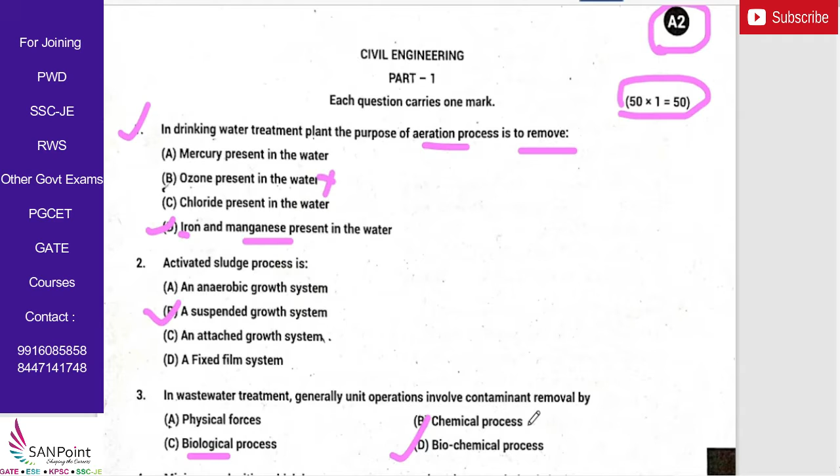Hence option D is correct. Next question. Activated sludge process is. So again it is from environmental engineering. Here the correct answer is it is a suspended growth system. Next question. In wastewater treatment, generally unit operations involve contaminant removal by. So again it is environmental engineering. Here the correct answer is biochemical process. Here even the biological process happens and along with that the chemical process also happens. So ಎರಡು simultaneous ಆಗಿರತ್ತೆ. Hence the correct answer here is option D.

Next question. The minimum velocity which is necessary to prevent the grit accumulation is in the range of. Again it is from environmental engineering. Here the correct answer is option C. Next. In activated sludge process, called ASP, most of the settled sludge is returned to the aeration tank to maintain. So activated sludge process ಒಳಗೆ ನಿಮ್ಗೆ ಗೊತ್ತಿರಬೇಕು, the activated sludge is recycled, or it is resent back. So why it is done ಅಂತಂದ್ರೆ: high population of microbes that permit rapid breakdown of the organic compounds. ಹೆಚ್ಚು ಮೈಕ್ರೋ ಆರ್ಗ್ಯಾನಿಸಮ್ಸ್ introduce ಮಾಡೋದಿಂತ್ರ process quick ಆಗಿ ಆಕೈತಿ, so we recirculate the activated sludge here. Again it is from environmental engineering.

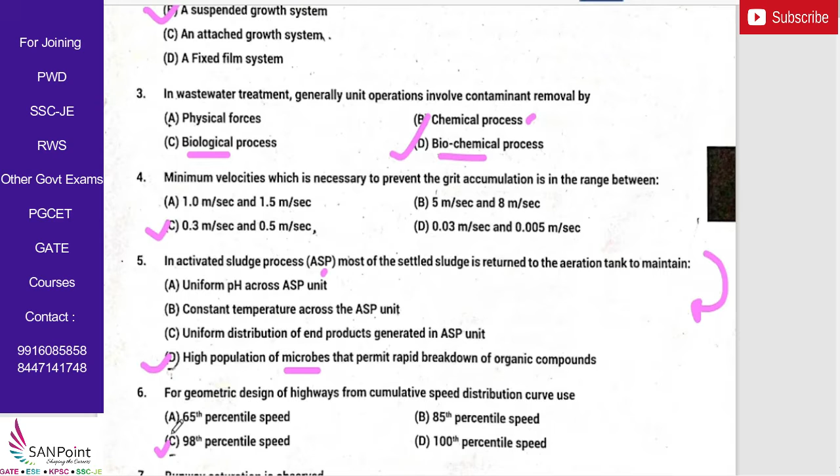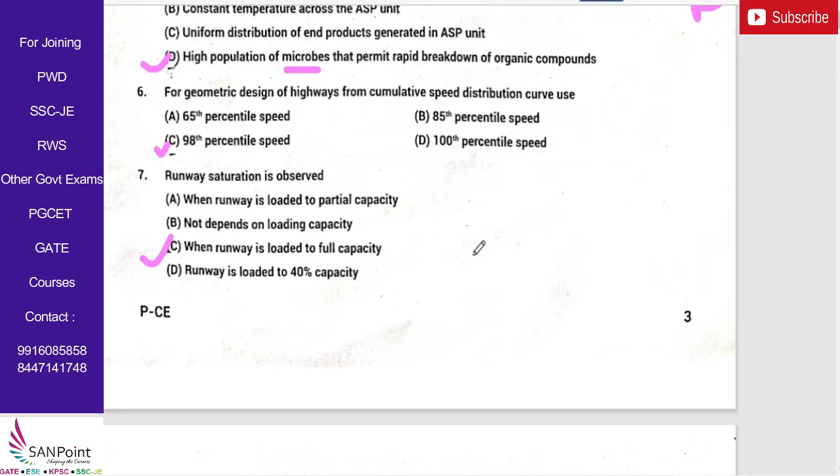Next question. For geometric design of highways from cumulative speed distribution curve use. So ನಾವು highway design ಮಾಡಬೇಕಂದ್ರೆ ಯಾವ ಸ್ಪೀಡ್ use ಮಾಡ್ತೀವಿ. It is 98th percentile speed, which is from highway engineering. Next question. Runway saturation is observed. It is from airport engineering. Here the correct answer is when the runway is loaded to the full capacity. Next question. Roughness of road can be measured using. Again it is from highway engineering. Here the correct answer is bump integrator.

Next. When cement concrete road is loaded at the corner, the critical combination of the stress. ಇದ್ರ ಮೇಲೆ ಬಹಳ ಸಲ ಕ್ವಶನ್ ಕೇಳ್ತಾರೆ different exams ಒಳಗ. But here we have studied in detail that in cement concrete road, when we consider the critical combination of the stresses, we don't consider the frictional stresses. Remember that at the corner, we consider only the load and the warping stresses.

So hence none of them is right in this particular option. So it is not applicable.

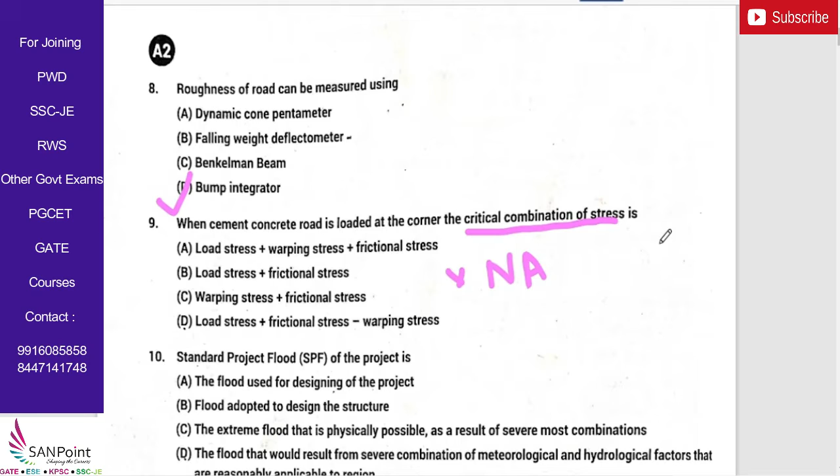Next, standard project flood (SPF) of the project is the flood that would result from severe combination of meteorological and hydrological factors that are reasonably applicable to the region. Again, this is from hydrology. 11th is also from hydrology.

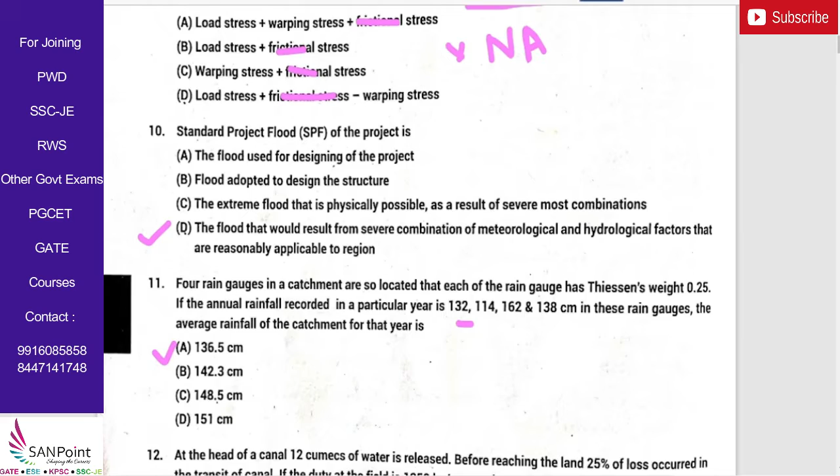4 rain gauges in a catchment are so located that each of the rain gauge has Thiessen weight of 0.25. If the annual rainfall recorded in a particular year is 132, 114, 162 and 138 centimeter in these rain gauges, the average rainfall of the catchment of this year is 136.5. So you can see here the solution.

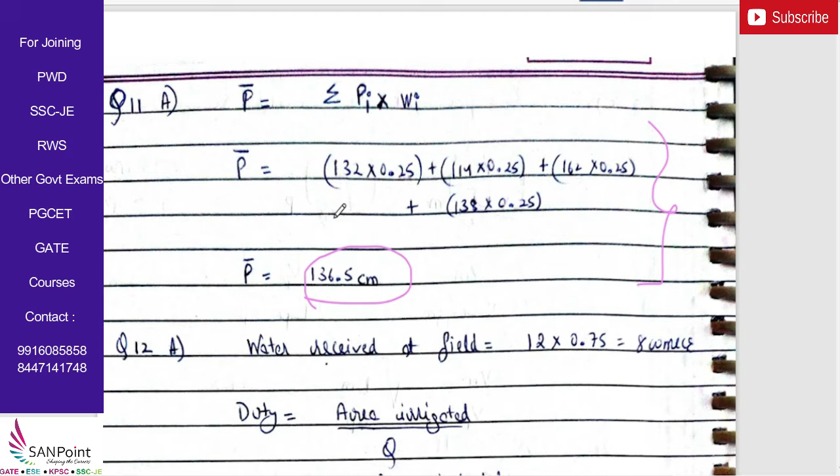Okay, so you can remember. So you can just go through the solutions. I won't be explaining the solutions of the numericals here as it will consume lot of time, but the numericals are solved very neatly stepwise. You can just go through that. If you got a different answer, you can just cross check.

Next question. In the head of a canal, 12 cumecs of water is released. Before reaching the land, 25% of loss occurred in the transit of the canal. So 25% loss happens. If the duty at the field is 1250 hectare per cumec, the area that can be irrigated is 10,000 hectares. So you can see the solution here. Okay, so this is the answer. You can just go through the steps.

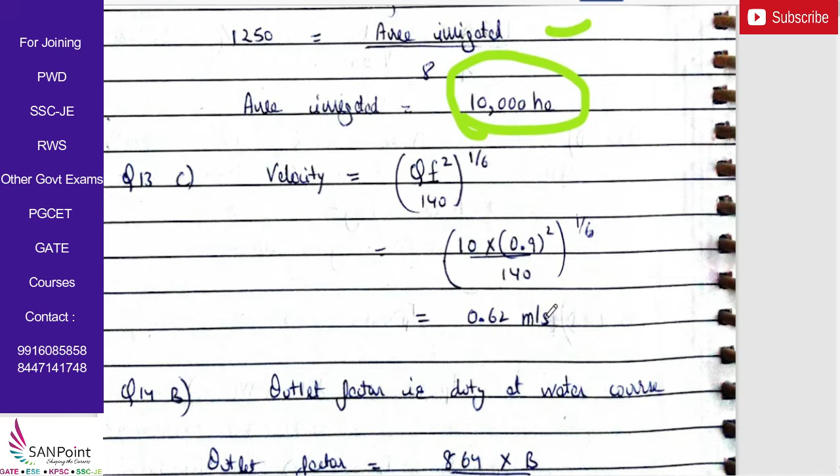Okay, next question. An unlined irrigation canal has to carry a full supply discharge of 10 cumecs. Assuming Lacey's silt factor as 0.9, the velocity in canal is 0.62 meter per second. So you can see here, this is the answer. Just go through the calculation.

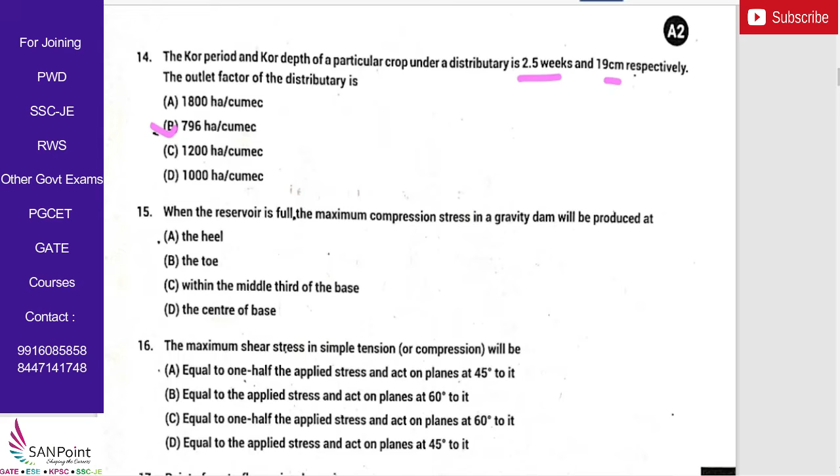Next, the kor period and the kor depth of a particular crop under a distributary is 2.5 weeks and 19 centimeter respectively. So kor period is 2.5 weeks, depth is 19 centimeter. The outlet factor of the distributary is option B, that is 796 hectare per cumec. So here you see, this is the answer. Next question.

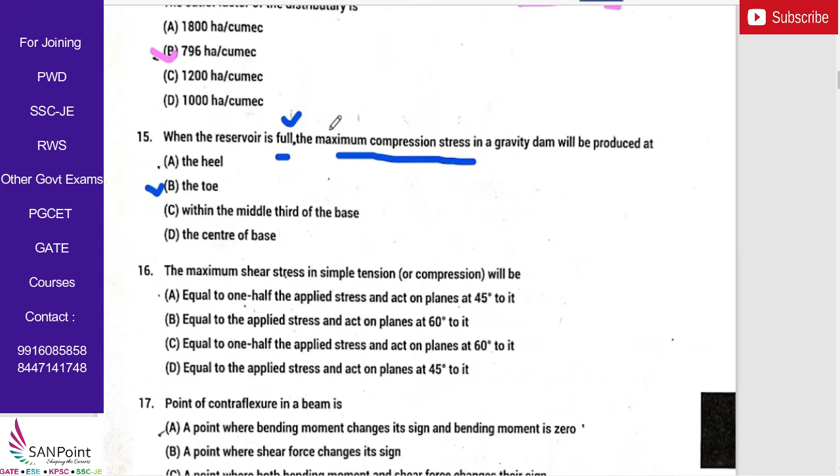When the reservoir is full, the maximum compression stress in the gravity dam will be produced at toe. Remember this. Okay, here if instead of full it was empty, then the answer would have been heel.

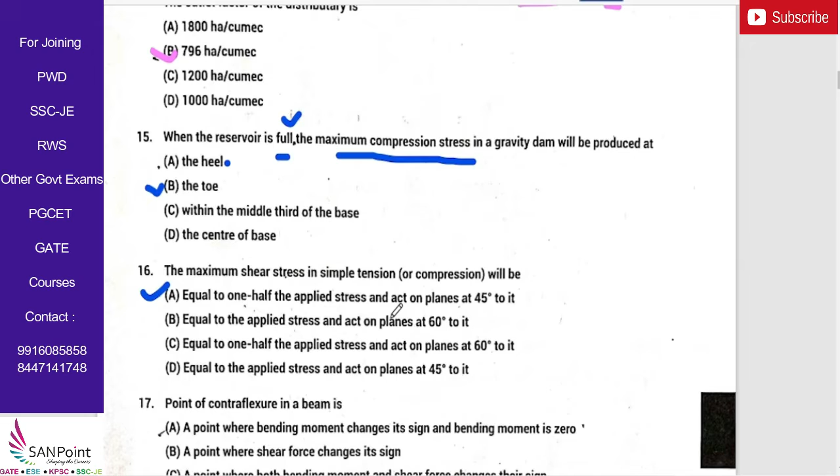Next question. The maximum shear stress in simple tension or compression will be equal to 1/2 the applied stress and act on planes at 45 degrees to it. Next question. The point of contraflexure in a beam is a point where bending moment changes its sign and bending moment is 0 here. Remember this.

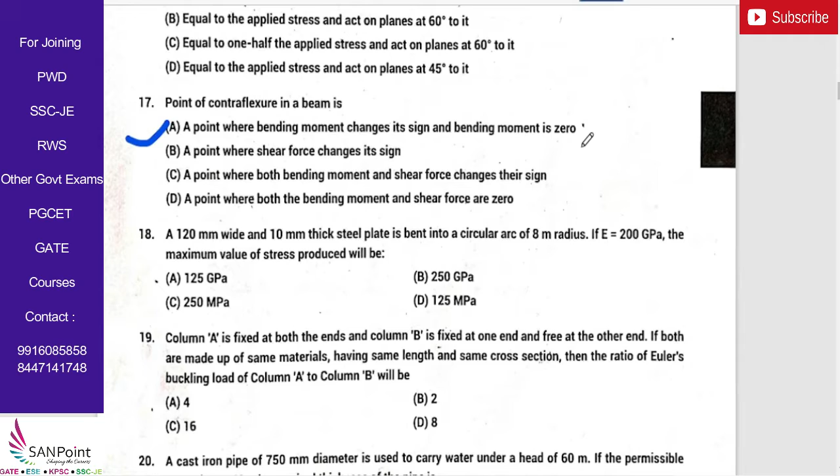Next, a 120 mm wide and 10 mm thick steel plate is bent into a circular arc of 8 meter radius. If Young's modulus is 200 GPa, the maximum value of stress produced will be, so if you see the solution here, this is the calculation. So it is 125 MPa. So here the correct answer is option D.

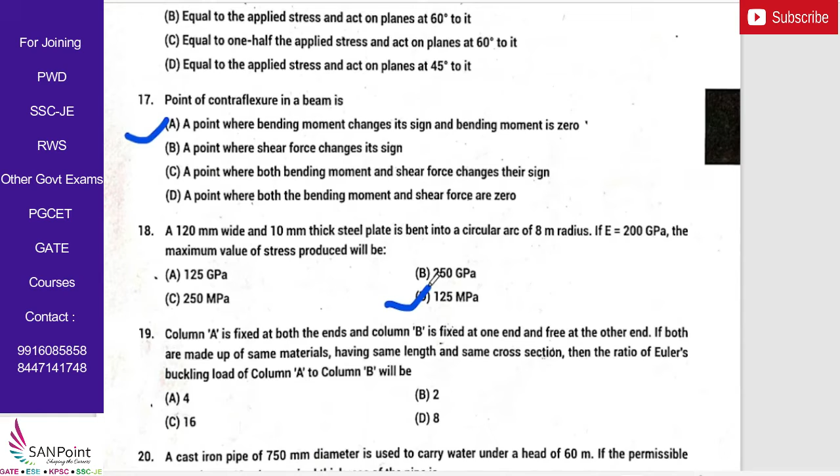Next question. A column A is fixed at both the ends and column B is fixed at one end and free at the other end. If both are made up of the same materials having same length and same cross section, then the ratio of Euler's buckling load of column A to column B will be equal to what? So it is 16. You can see the solution here. Okay. So this is the calculation. This is how we will get the answer as 16.

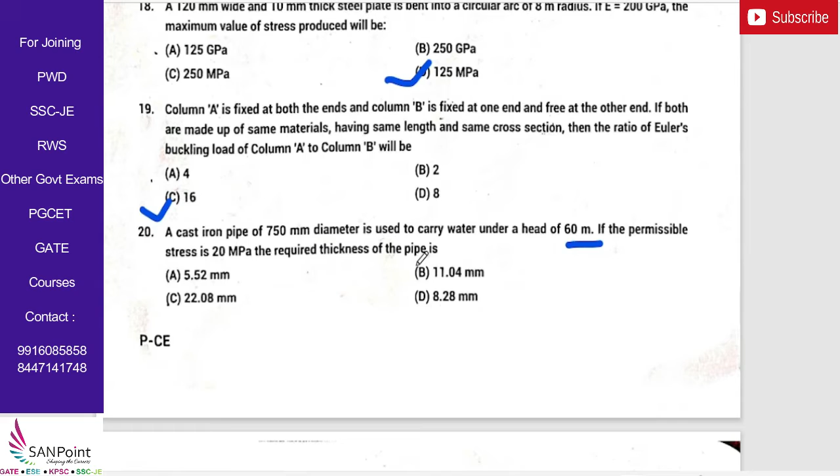Next question. A cast iron pipe of 750 mm diameter is used to carry water under a head of 60 meter. If the permissible stress is 20 MPa, the required thickness of the pipe is option B. Okay, 11.04. So you can see here, this is the calculation.

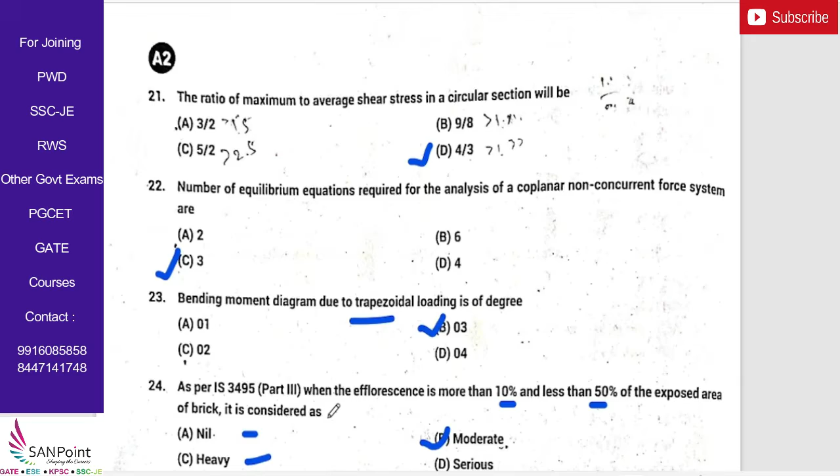Next, as per IS 3495 part 3, when the efflorescence is more than 10% and less than 50% of the exposed area of the brick, it is considered to be what? Moderate. So based on what percentage the efflorescence covers, we classify it. So you need to remember the table.

Next, the ordinary Portland cement achieves 70% of its final strength in how many days? In 7 days. So that's why we find the compressive strength at the 7 day.

Next question. Area of plan of an old map plotted to a scale of 10 meters to 1 centimeter measures 100.2 square centimeter by a planimeter. The plan is found to have shrunk so that a line originally 10 centimeter long measures 9.7 centimeter on the map.

The true area on the plan of the map will be equal to 106.50 centimeter square. So you can see here the calculation. So this is the solution here.

Next question. The focal length of the object glass of a tachyometer is 200 mm. The distance between the vertical axis of the tachyometer and the optical center of the object glass is 100 mm, and the spacing between the upper and the lower line of the diaphragm axis is 4 mm. With the line of collimation perfectly horizontal, the staff intercepts are 1 meter top, 2 meter in the middle and 3 meter bottom. The horizontal distance in meters between the staff and the instrument is option A.

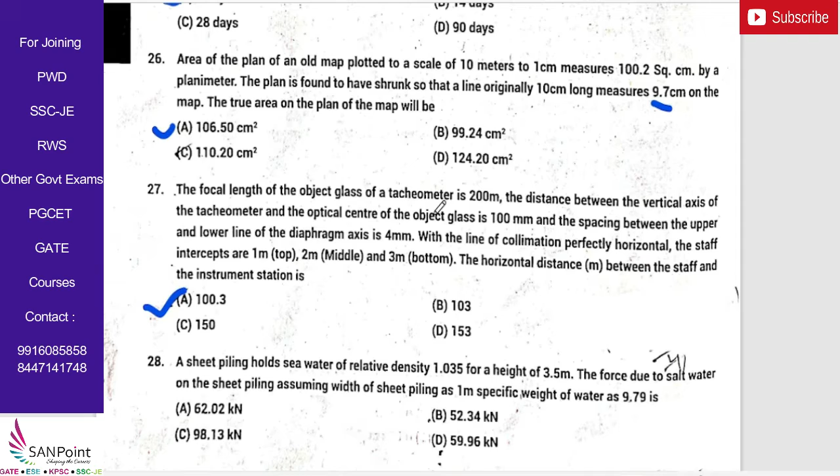Okay, so all these are in survey; if you remember the diagram, then only you will be able to answer these kind of questions. So here this is the solution.

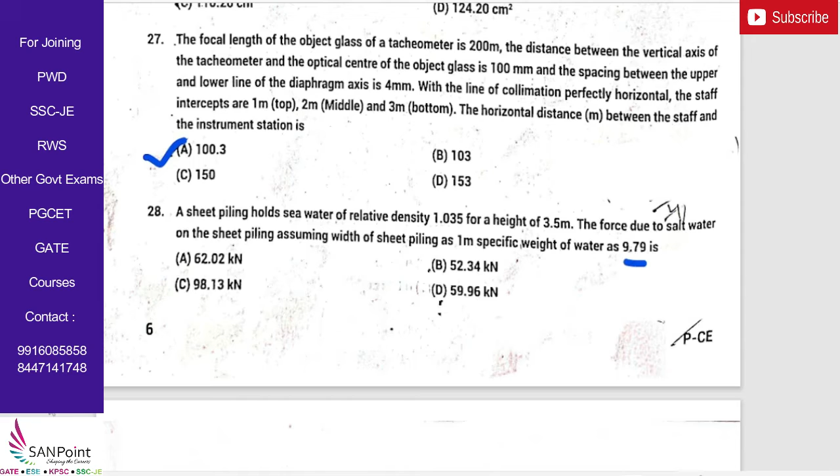Next question. A sheet piling holds seawater of relative density of 1.035 for a height of 3.5 meter. The force due to salt water on the sheet piling, assuming width of sheet piling as 1 meter, specific weight of water as 9.79, is? So the force is what they are asking here. Here the correct answer is option A, that is 62.02 kilonewton. So you can see here, this is the solution.

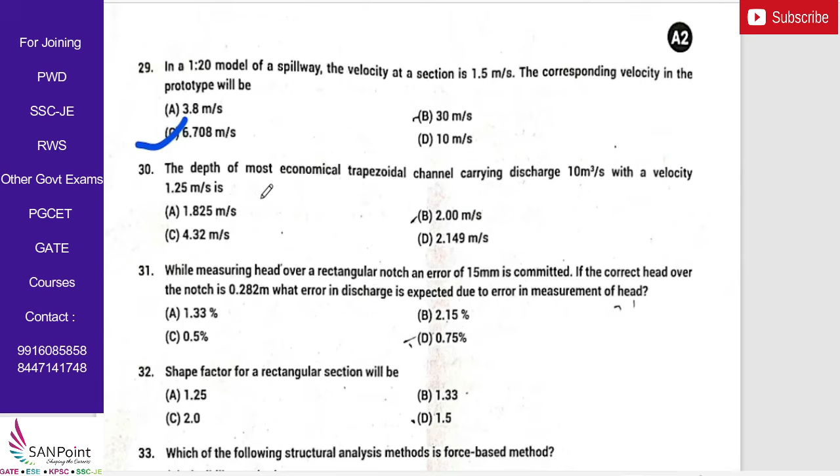Next, the depth of most economical trapezoidal channel carrying discharge 10 meter cube per second with a velocity of 1.25 meter per second is what? So it is 2.149 meter. So you can see here, this is the solution.

Next question. While measuring head over a rectangular notch, an error of 15 mm is committed. If the correct head over the notch is 0.282 meter, what error in discharge is expected due to error in measurement of the head? So here the answer is not matching. Actually we are getting somewhere around 7.9. You can just cross check.

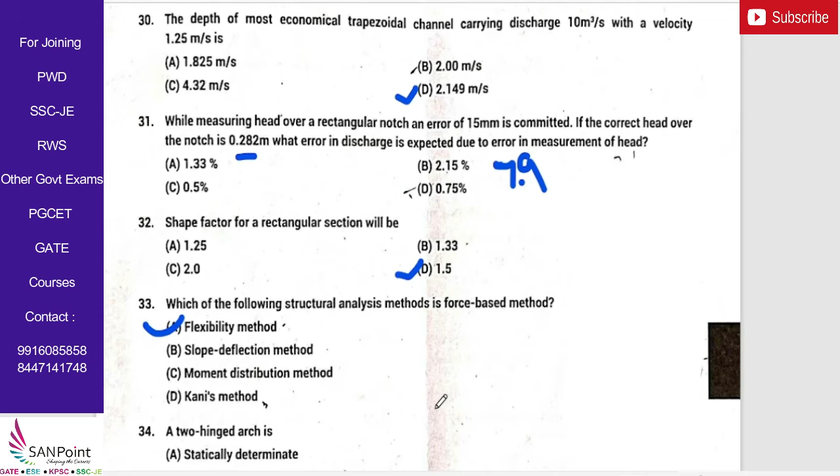Next, shape factor for a rectangular section will be equal to what? It is 1.5. Next, which of the following structural analysis methods is a force based method? So here the correct answer is option A, that is flexibility method. Next, two hinged arch is, so what is it? It is statically indeterminate to 1 degree.

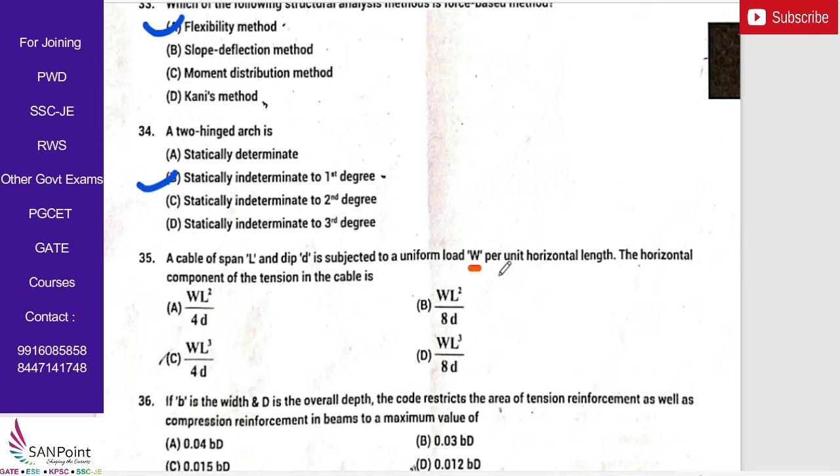Next, a cable of span L and dip D is subjected to a uniform load W per unit horizontal length. The horizontal component of the tension in the cable is option B. Next, if B is the width and D is the overall depth, the code restricts the area of tension reinforcement as well as the compression reinforcement in beams to the maximum value of 0.04 BD.

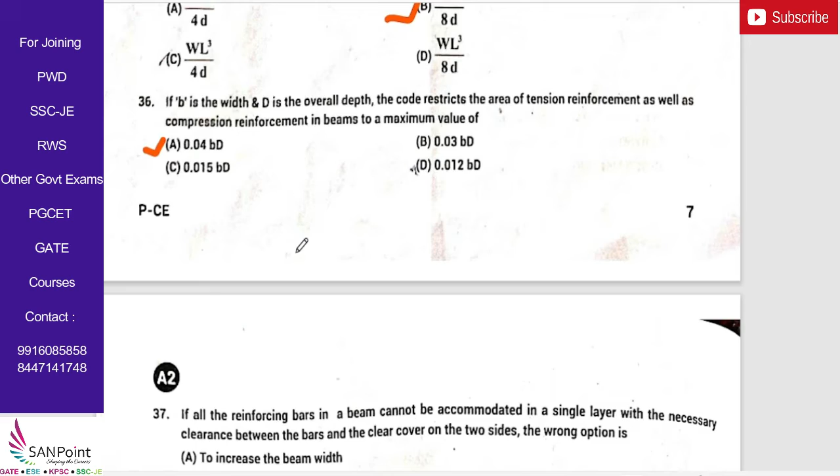Next, if all the reinforcing bars in a beam cannot be accommodated in a single layer with the necessary clearance between the bars and the clear cover on the two sides, the wrong option is, so they asked for the wrong option among these, here it is to increase the beam depth. So this doesn't work. In beams where bent up bars are provided, their contribution towards shear resistance as per IS code shall not be more than what? It is 50% of the total shear reinforcement.

Next question. In which of the following measures adopted, the bond strength cannot be enhanced? So, in which is it not enhanced? It is when larger bar diameter and low grade of concrete are used. Next, the slenderness ratio in a tension member as per IS code where reversal of stress is due to loads other than wind or seismic forces should not exceed. So here the correct answer is 180.

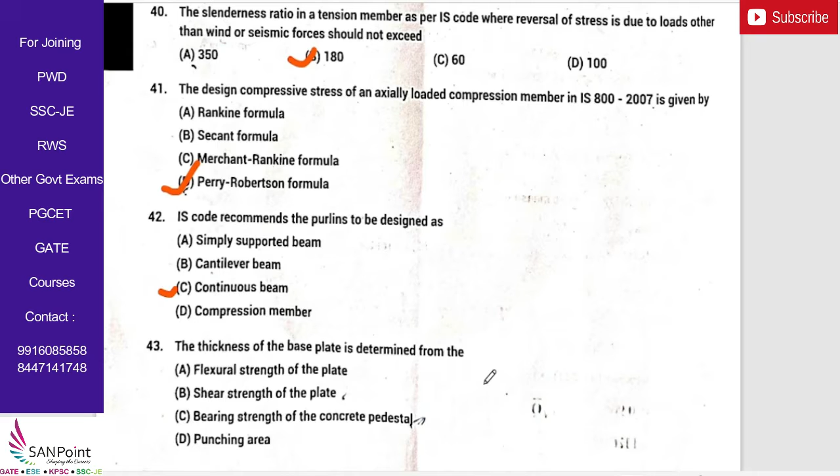Next, the design compressive stress of an axially loaded compression member in IS 800-2007 is given by option D. Next, IS code recommends the purlins to be designed as option C, continuous beam. The thickness of the base plate is determined from flexural strength of the plate. Next, the clay having the activity of 0.9 is classified as option B.

Next, as per IS soil classification system, a soil with liquid limit 80% and plasticity index 20% is classified as option D, MH or OH. You can see here. Okay, so this is the answer. Next, for analyzing stability of slopes in Taylor's method, the stability number of various slope angles can be obtained for, so it is mobilized cohesion.

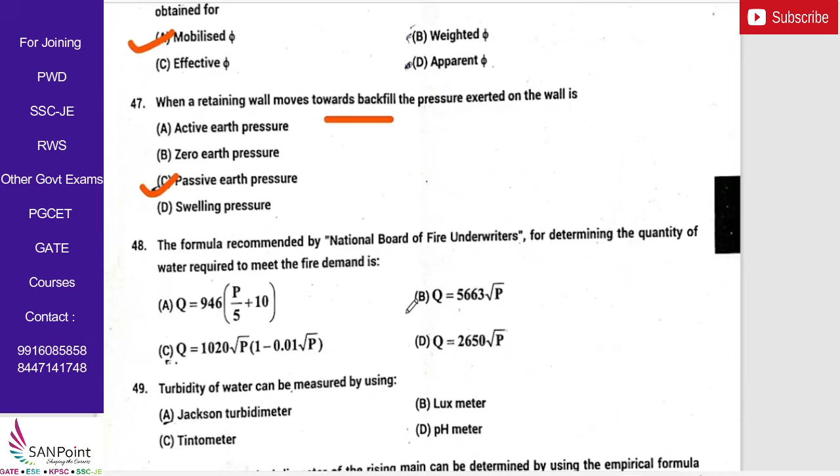Next, when the retaining wall moves towards the backfill, the pressure exerted on the wall is called as, so again this is a very favorite one, towards the wall or away from the wall. So here the correct answer is passive earth pressure. Next, the formula recommended by National Board of Fire Underwriters for determining the quantity of water required to meet the fire demand is option C.

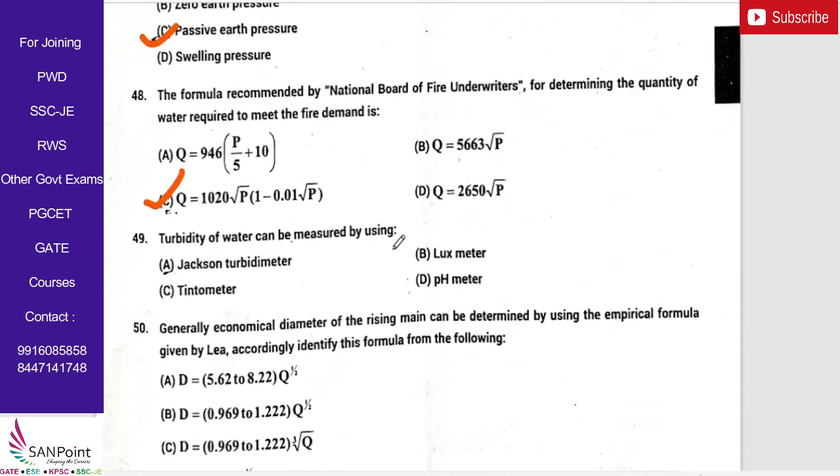Next, turbidity of water can be measured by using option A. Next, generally economical diameter of the rising main can be determined by using the empirical formula given by Lea.

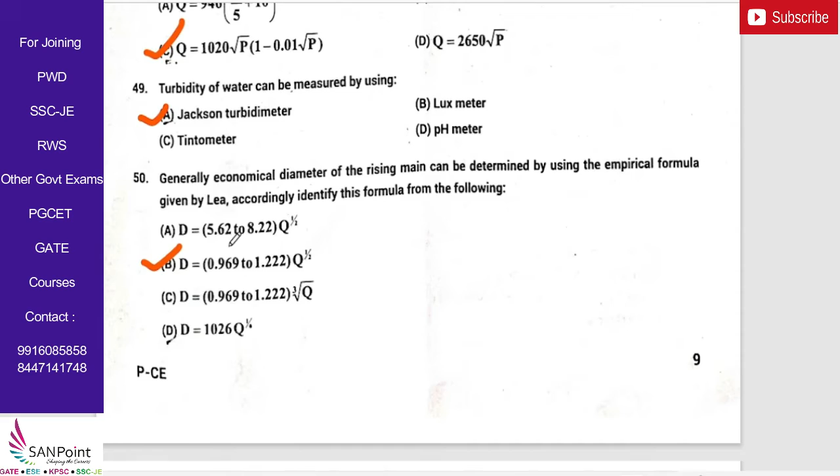Accordingly, identify this formula from the following. So here it is option B. So these were all the 1 mark questions. Now let's go through 2 mark questions.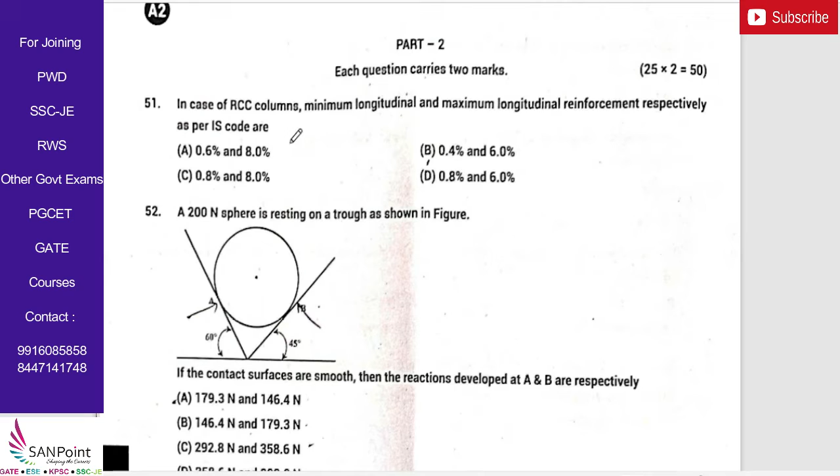In case of RCC columns, minimum longitudinal and maximum longitudinal reinforcement respectively as per IS code are, it is option D, 0.8% and 6%. Next, so this is the calculation. So here the correct answer is this much. So you can see here, you can do the calculation.

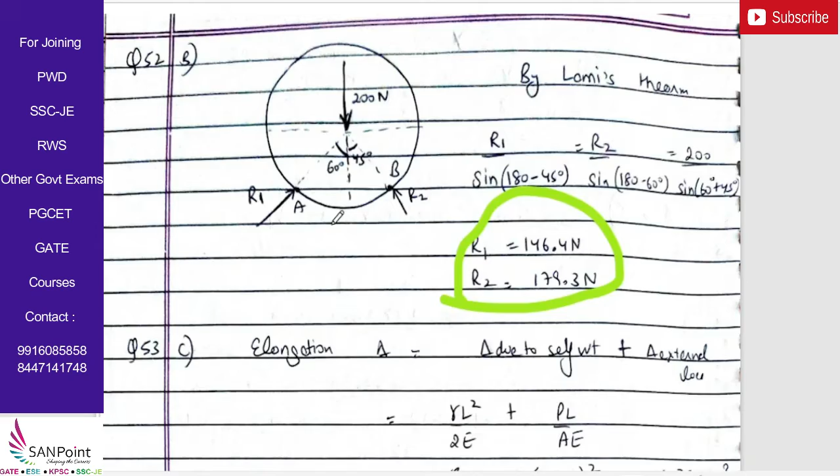So next question, a steel wire of 8 mm diameter is used to lift a weight of 1.5 kilonewton at its lower end. If the length of the wire is 100 meter, Young's modulus is 205 GPa and the density of the wire material is 8000 kg per meter cube. The elongation of the wire is, so here the correct answer is option C. So you can see the calculation here. 16.47 mm. Fine.

Next, a soil has bulk density of 20 kilonewton per meter cube and water content of 16%. If soil partially dries to a density of 18 kilonewton per meter cube and void ratio remains the same, then the water content is, it is option B, 4.4%. You can see here. Okay, so this is the solution.

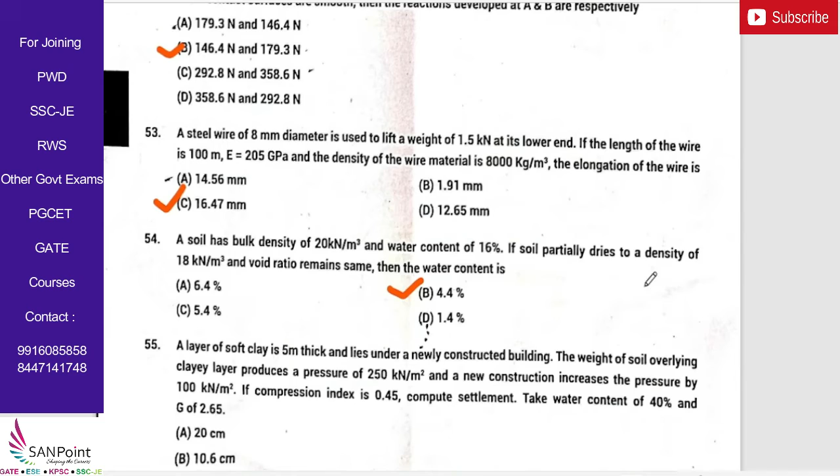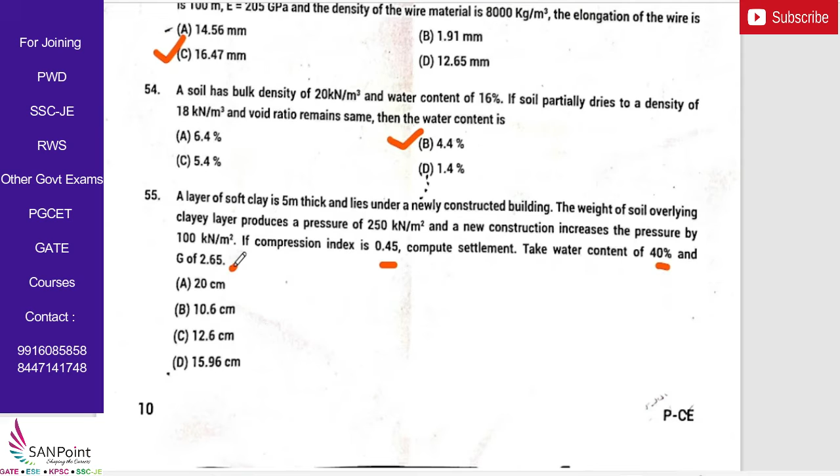Next, a layer of soft clay is 5 meter thick and lies under a newly constructed building. The weight of soil overlying clayey layer produces a pressure of 250 kilonewton per meter square and a new construction increases the pressure by 100 kilonewton per meter square. If compression index is 0.45, compute settlement. Take water content of 40% and G as 2.65. So here the correct answer is 15.96. So you can see the calculation here.

Next, in water supply to a city, water is conveyed by lifting through pump. If the power input required by the pump is 52.1 kilowatt and efficiency of the motor is 90%, estimate the power output of the motor. So here the correct answer is option B. So you can see here.

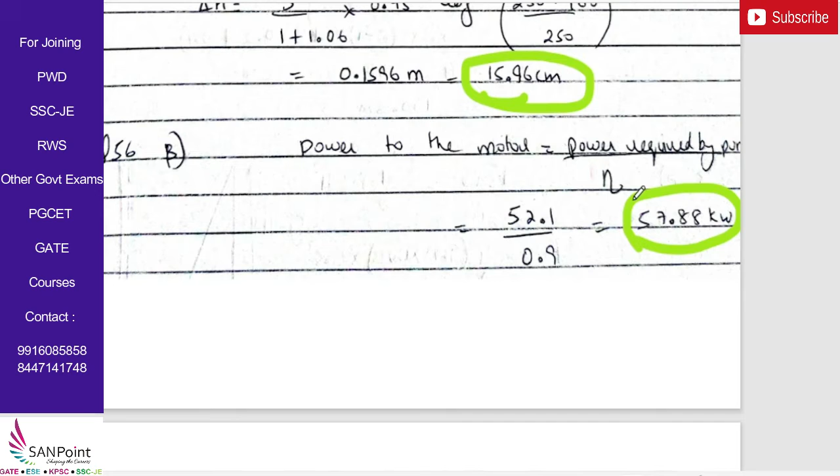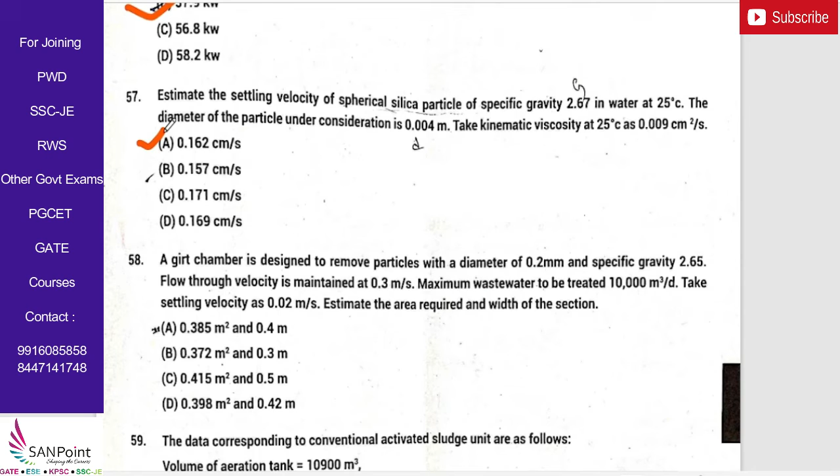Next, estimate the settling velocity of spherical silica particle of specific gravity 2.67 in water at 25 degrees Celsius. The diameter of the particle under consideration is 0.004 meter. Take kinematic viscosity at 25 degrees Celsius as 0.009 centimeter square per second. So here we need to calculate the settling velocity and the correct answer is 0.162 centimeter per second. So you can see the calculation here.

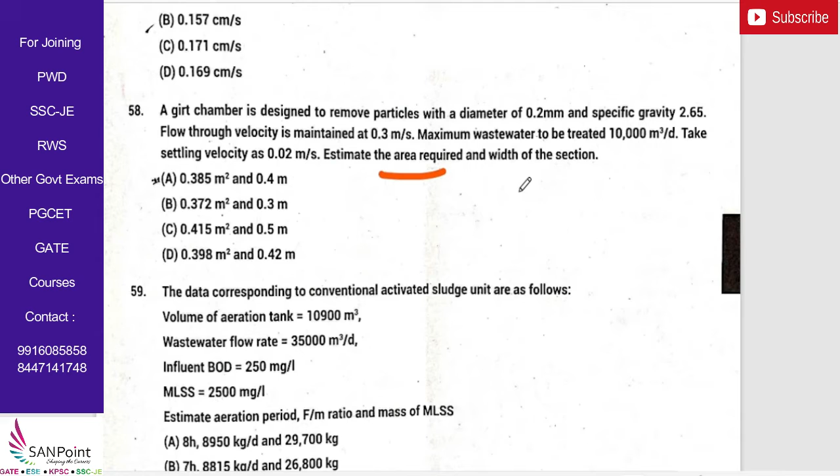Next question. A grit chamber is designed to remove particles with a diameter of 0.2 mm and specific gravity 2.65. Flow through velocity is maintained at 0.3 meter per second. Maximum wastewater to be treated 10,000 meter cube per day. Take settling velocity as 0.02 meter per second and now you need to estimate the area required and the width of the section. So here the correct answer is option A. So you can see here, this is the area required and this is the width.

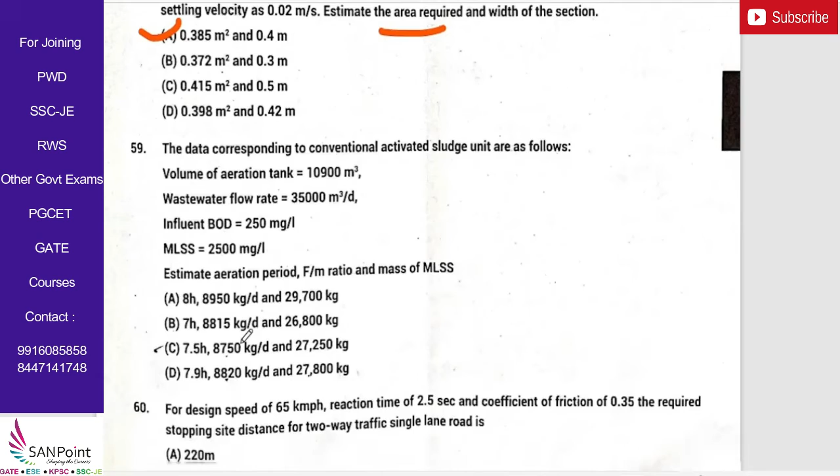Next question. The data corresponding to conventional activated sludge unit. So this data is given, we need to estimate the aeration period, F by M ratio and the mass of the MLSS. So we can see the calculation here. So for the first one, the answer is 7.47 hours, that is the aeration period. So if we see only this option is correct, hence you can tick mark it straight away without doing the calculation of these two values.

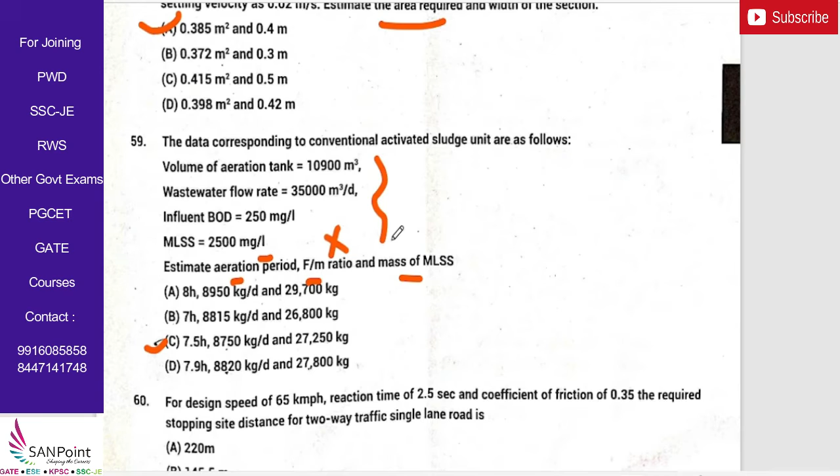Next, for design speed of 65 km per hour, reaction time of 2.5 second and coefficient of friction of 0.35, the required stopping sight distance for two-way traffic single lane road is. So you need to calculate SSD. So you can see here. Here the correct answer is 185.4. So this one option C.

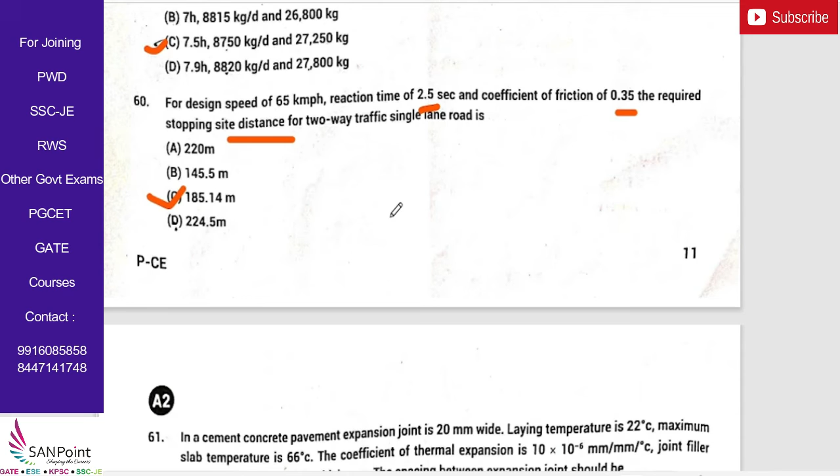Next question. In a cement concrete pavement, expansion joint is 20 mm wide. Laying temperature is 22 degrees Celsius. Maximum slab temperature is 66 degrees Celsius. The coefficient of thermal expansion is 10 into 10 raised to -6 mm per degree Celsius. Joint filler compression is 40% of the thickness. The spacing between the expansion joint you need to calculate here. So here the correct answer is option A, 18.18 meter. So you can see here, if you do the calculation you will get the length as 18.18 meter.

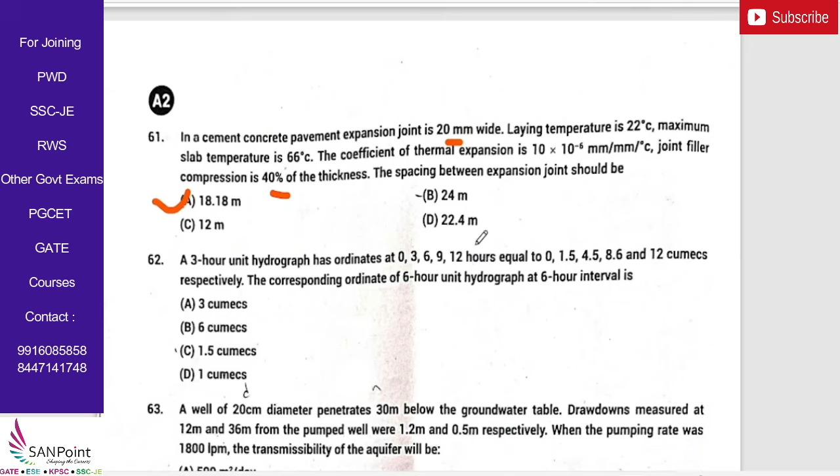Next question. A 3 hour unit hydrograph has ordinates of. Okay, so this is a hydrograph question. So here the correct answer is 3 cumecs. Okay, so you can see here.

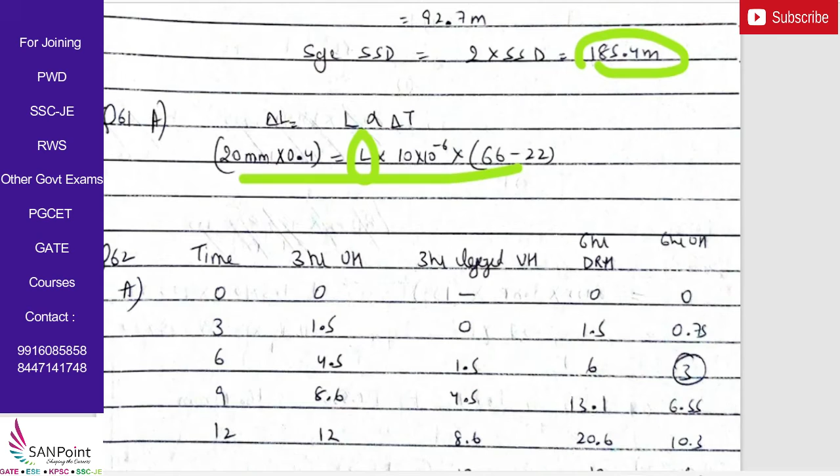Next, a well of 20 centimeter diameter penetrates 30 meter below the groundwater table. Drawdowns measured at 12 meter and 36 meter from the pumped well were 1.2 meter and 0.5 meter respectively. When the pumping rate was 1800 LPM, the transmissibility of the aquifer will be. So here the correct answer is

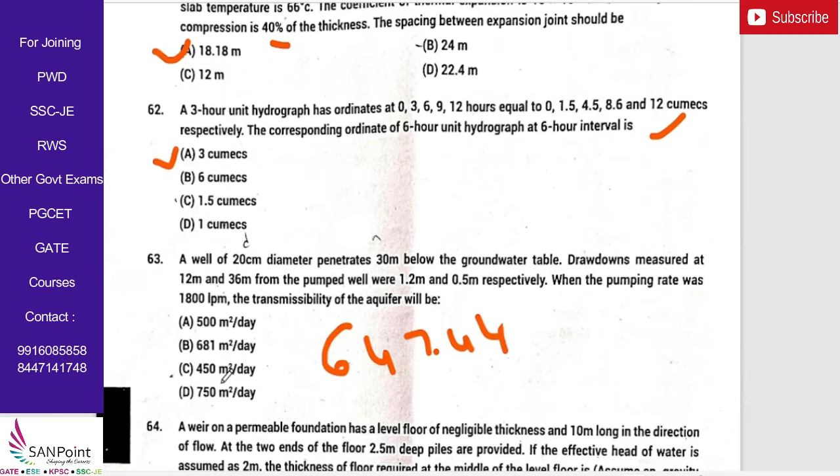647.44. So you can see the calculation here, which is 63. So as per the calculation, here none of them matches, but the nearest one you can click.

Okay. Next, a weir on a permeable foundation has a level floor of negligible thickness and 10 meter long in the direction of the flow. At the two ends of the floor, 2.5 meter deep piles are provided. If the effective head of water is assumed as 2 meter, the thickness of floor required at the middle of the level floor is, and assume specific gravity as 2.24.

So here the correct answer is 1.07 meters. So you can see here. Okay, go through the calculation.

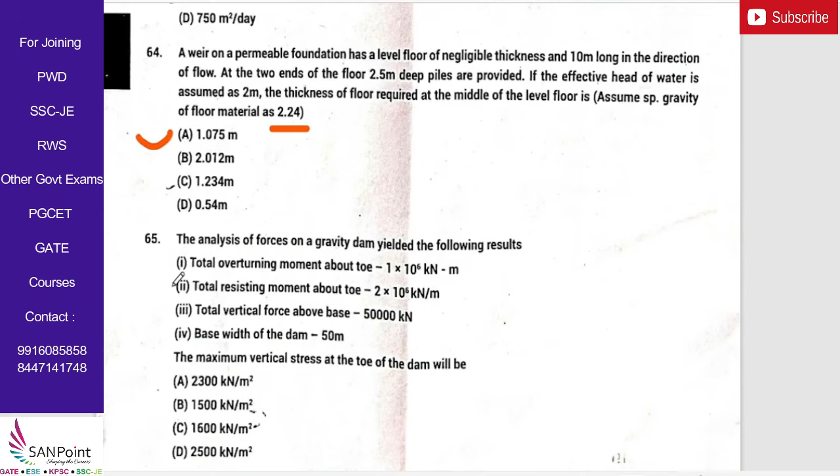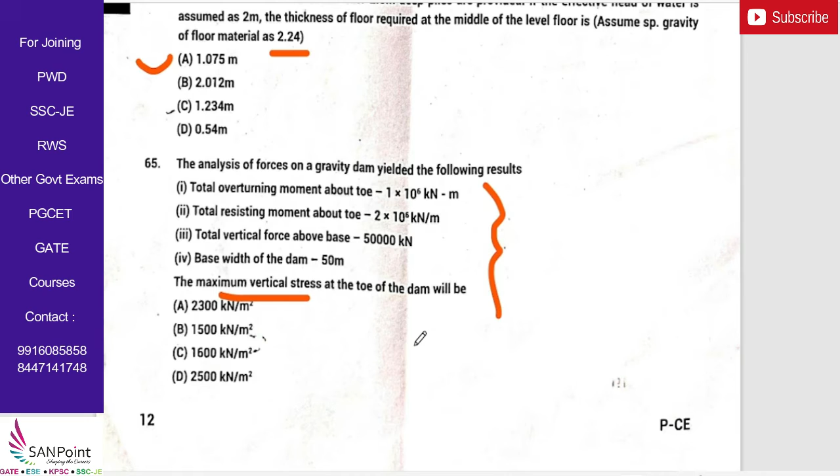Next question. The analysis of forces on a gravity dam. So this is the data, and here you need to calculate the maximum vertical stresses at the toe of the dam. So here the correct answer will be option C. So you can see here, this is the calculation for this question.

Okay. Next, the principal stresses at a point in an elastic material are 60 Newton per mm square tensile, 20 Newton per mm square tensile and 50 Newton per mm square compressive. If Young's modulus is 1 into 10 raised to 5 Newton per mm square and Poisson's ratio is 0.35, the volumetric strain will be, so here the correct answer is 9 into 10 raised to -5. So you can see the calculation.

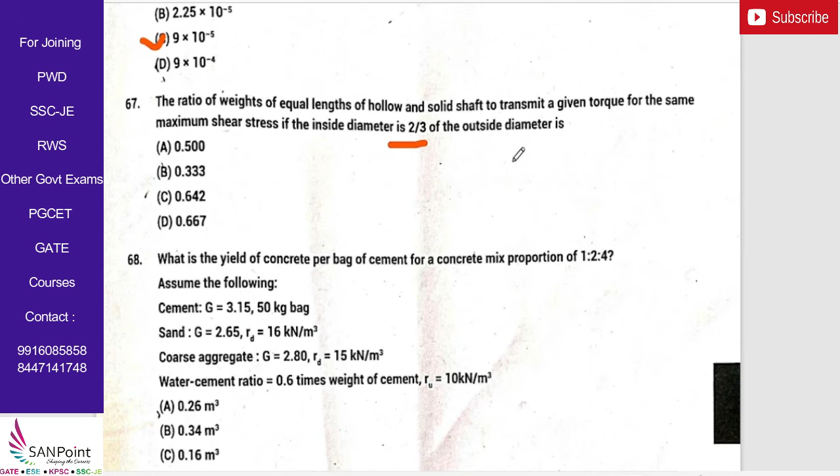Fine. Next question, the ratio of weights of equal lengths of hollow and solid shaft to transmit a given torque for the same maximum shear stress if the inside diameter is 2/3 of the outside diameter. So here the correct answer is 0.642. So you can see this is the calculation. Okay. So it is a little bit lengthy. So this is 0.643. Okay?

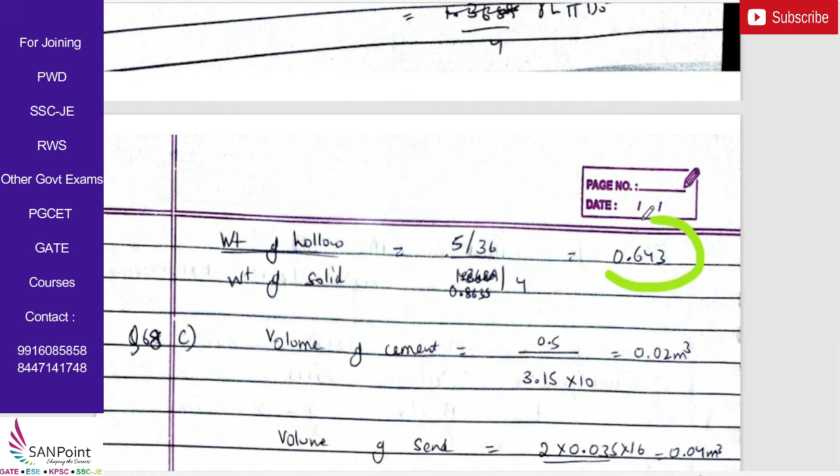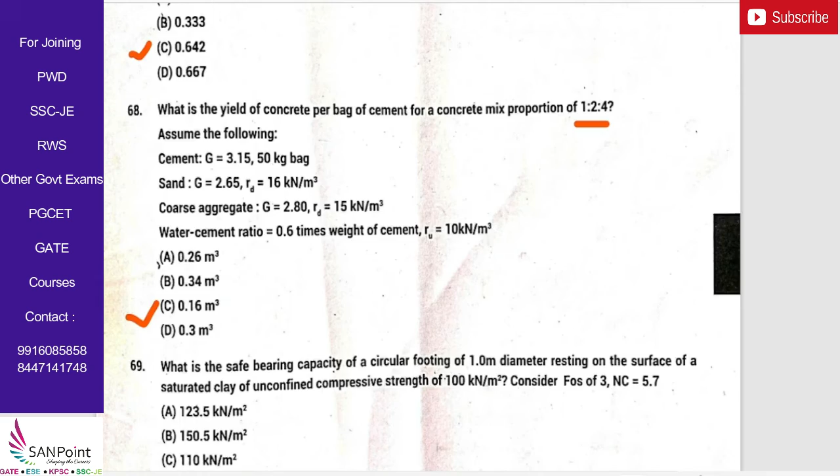Next. What is the yield of concrete per bag of cement for a concrete mix proportion of 1:2:4? So the correct answer is option C, that is 0.16 meter cube. So you can see here. Okay, so these are the steps and this is the answer.

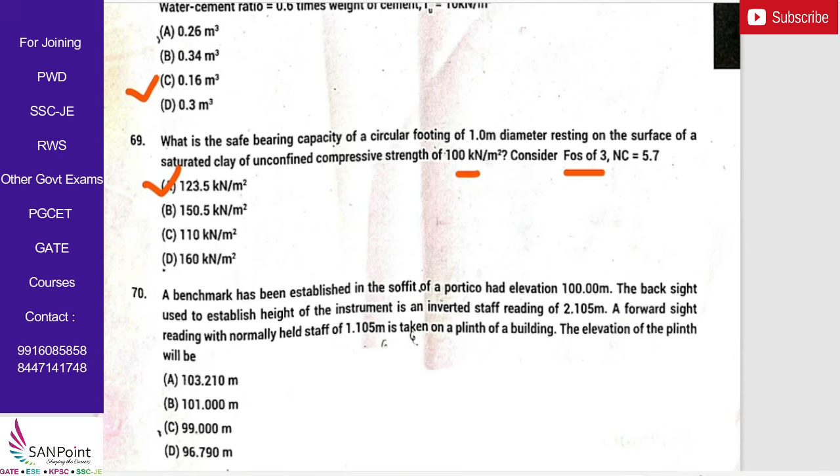Fine. Next question. What is the safe bearing capacity of a circular footing of 1 meter diameter resting on the surface of a saturated clay of unconfined compressive strength of 100 kN per meter square? Consider factor of safety 3, Nc 5.7. So here the correct answer is option A. You can see here. Okay, so this is the answer.

Next, a benchmark has been established at a soffit of a portico with elevation 100 meter. The backsight used to establish height of the instrument is an inverted staff reading, so inverted concept, which is 2.105 meter. The foresight reading with normally held staff of 1.105 meter is taken on a plinth of the building. The elevation of the plinth is asked.

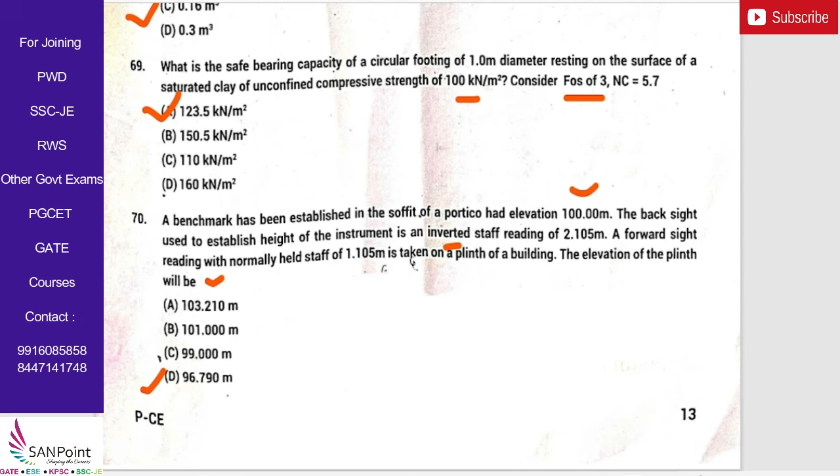So here the correct answer is 96.790. So you can see here, these are the steps. So this is the answer. So by drawing a diagram you can answer, or step wise also you can write an answer.

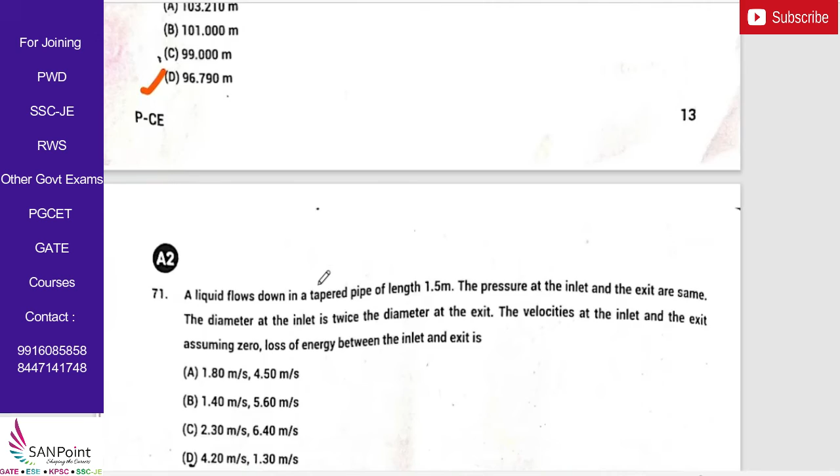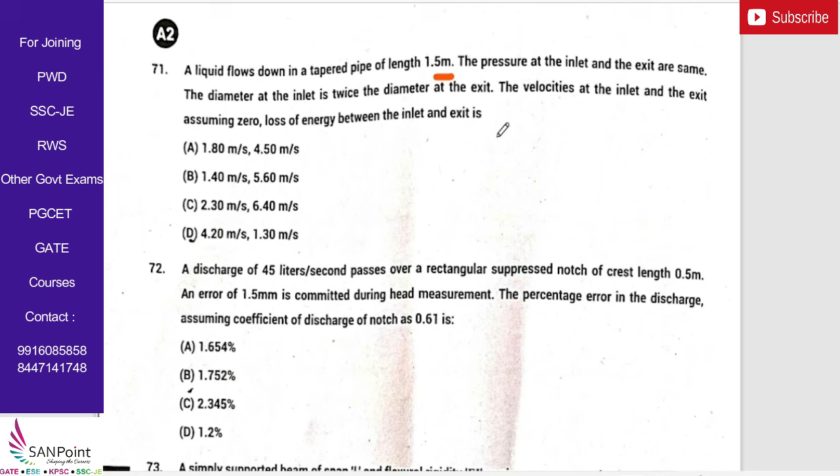Next, a liquid flows down in a tapered pipe of length 1.5 meter. The pressure at the inlet and the exit are same. The diameter at the inlet is twice the diameter at the exit. The velocities at the inlet and the exit, assuming 0 loss of energy between the inlet and the exit. So it is option B. So you can see here. Okay. So these are the answers.

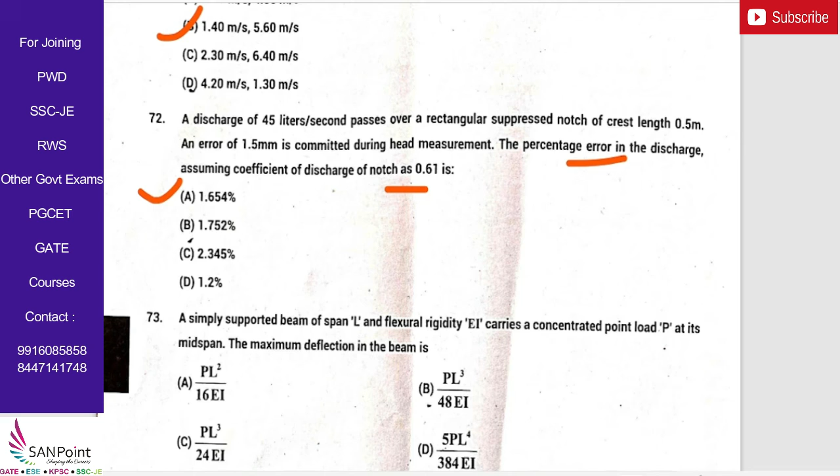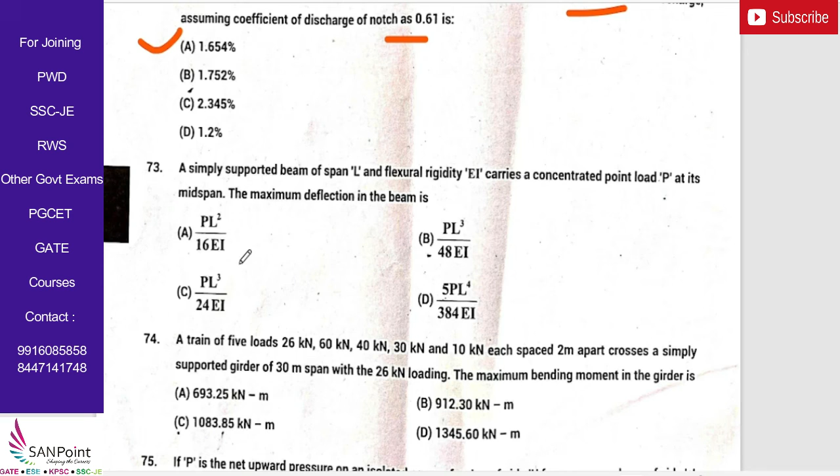This is the answer. Next, a simply supported beam of span L and flexural rigidity EI carries a concentrated point load P at its midspan. The maximum deflection of the beam is, so it is formula based, you need to remember. Here the correct answer is option B.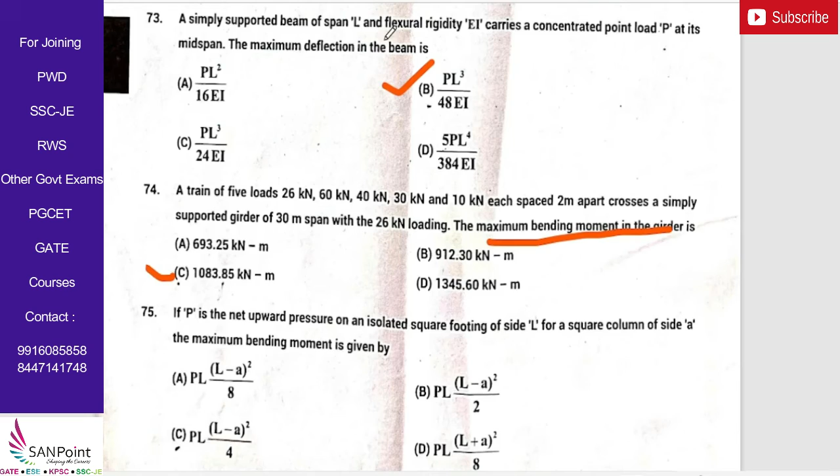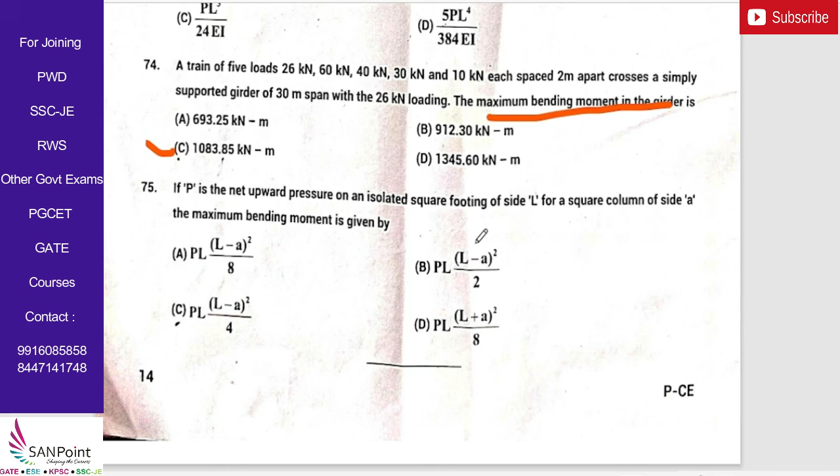Next question, if P is the net upward pressure in an isolated square footing of side L for a square column of side A, the maximum bending moment is given by, so formula based question. Here the correct answer is option A. So hope you have got the answers for almost all the questions.